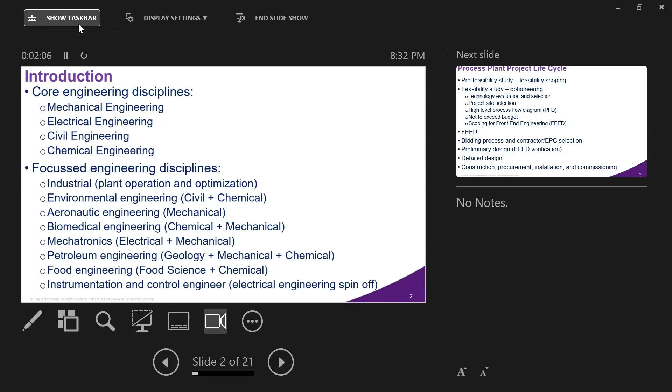So when someone wants to consider engineering as a career, they have to think about whether they want to be a general engineer, which is the four disciplines that I've just mentioned, or they want to focus on a specific engineering discipline, like aeronautic engineering, or mechatronics, or petroleum engineering. So these are the main engineering disciplines and the spin-offs.

So the next slide is the process plant project life cycle. Every process plant project starts with the pre-feasibility study, which is basically feasibility scoping. And then follows the feasibility study, which is optioneering: technology evaluation, selection, project site selection, high-level process flow diagram, not-to-exceed budget, and scoping for front-end engineering, which is called FEED.

Most of the people who are familiar with FEED are those from oil and gas. Other disciplines in the municipal world use preliminary engineering, but in oil and gas they use FEED, front-end engineering, which is basically preliminary engineering. So it starts with pre-feasibility, feasibility, FEED, and then the bid process and contract, EPC selection, and that's where the bid ends.

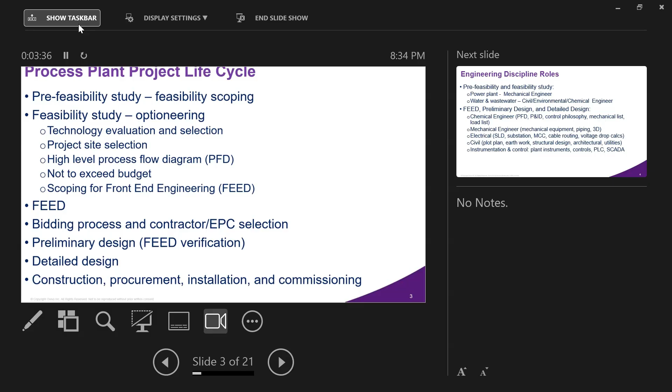And then the successful bidder starts to do preliminary design, which is basically FEED verification, detailed design, construction, procurement, installation, and commissioning. So this is the life cycle of any process plant, from the beginning to the end. And there are different disciplines that contribute to this effort.

During pre-feasibility and feasibility study, if it's a power plant, a mechanical engineer will take the lead. If it's water and wastewater, civil, environmental, or chemical will take the lead. During the FEED study, which is front-end engineering design, if it is a process plant, chemical engineers will prepare the process flow diagram, the P&ID, which is the piping and instrumentation diagram, control philosophy, mechanical list, and load list.

They will prepare that. And the mechanical engineer will prepare mechanical equipment, piping, and the 3D. The electrical engineer for the plant will prepare the single line diagram, SLDs, substation, design of transformers, motor control center, MCC, cable routing, voltage drop calculations, and all that will be done by the electrical engineer.

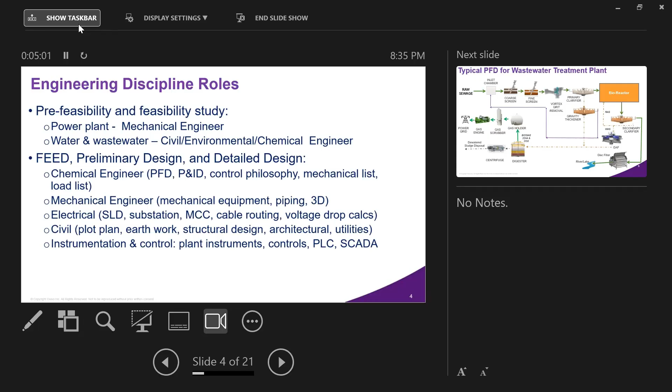The civil engineer will do the plot plan, earthworks, structural design, architectural, utilities. Architectural, even though it's a different discipline, a lot of people club it with the civil. And then the least known engineering discipline is instrumentation and control, which plays a huge role in the process plant industry. They prepare the plant instruments, controllers, PLC, SCADA system. These are mostly either electrical engineers who get trained or instrumentation control engineers.

So this is just a basic process flow diagram for a wastewater treatment plant, sewage treatment plant. You can see you have got a coarse screen, finer screen, grit removal system, primary clarifier, bioreactor, secondary clarifier. And then the sludge goes to a digester producing biogas, and the biogas is used to produce electricity using a gas engine. Then treated water goes to a disk filter and use.

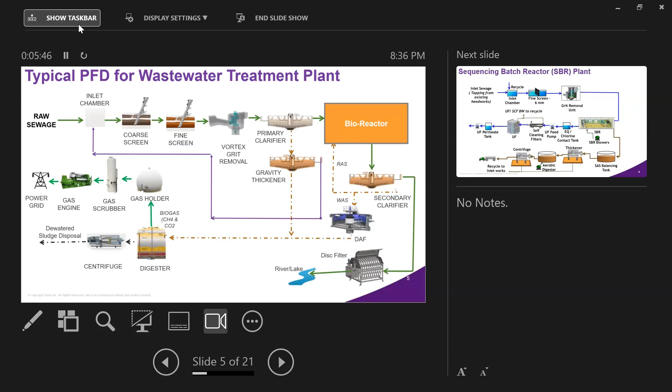This is actually a project that I worked on in the past, and this project is in the Middle East, and one of them is also in India. So basically, this is just a general process flow diagram. This is also another one, which is a sequencing batch reactor, which also uses ultrafiltration as a tertiary treatment, and thickening and dewatering. So this is basically what I said, process flow diagram. This is what I actually mean.

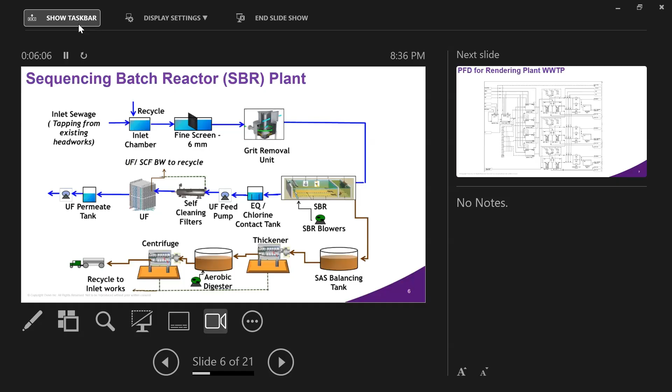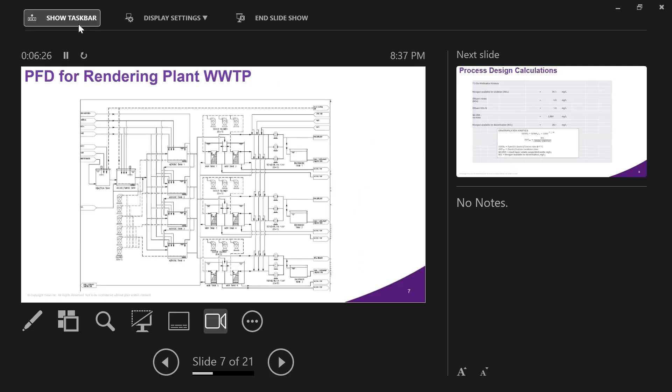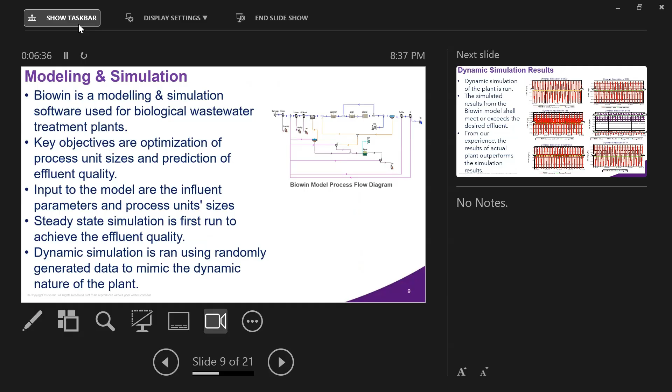Now, this is an actual process flow diagram that's part of the deliverables for the process chemical engineering discipline. I'm not going to spend a lot of time explaining what it is. I just want to give you a high-level understanding of how the different engineers work together in a project. Process engineers will prepare the design calculations. They will prepare the modeling and simulation for the plant. Before you build the plant, you have to make sure that it's going to work, and that's where the simulation and modeling comes into the picture.

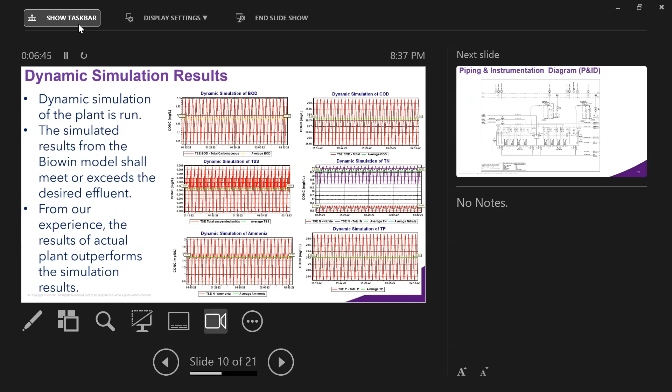And then prepare the piping and instrumentation diagram. The piping and instrumentation diagram is basically the blueprint of the plant, and this is what chemical engineers will prepare. It will show the pipe size, all the instruments required for the plant, where we need to have MCC control, where we need to have PLC control. It will show all the instruments, all the valves, all the details of the instrument, whether it's a flow meter, a level transmitter, a pressure sensor, temperature sensor. All those need to be shown here, and this is what everybody else is going to use downstream.

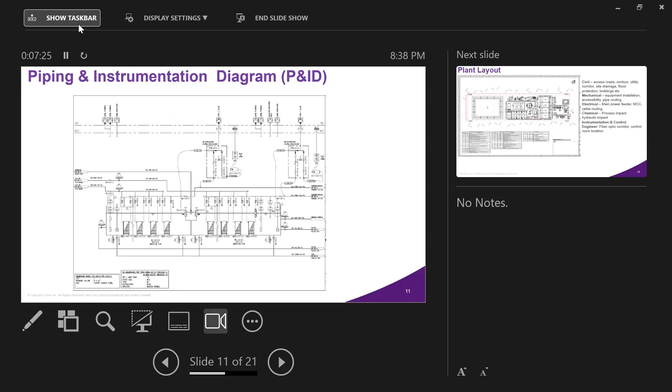This is a wastewater treatment plant plot plan. And you can see different contributions from different engineering disciplines. The civil engineer will take the lead in access roads, contours, utility when preparing the plot plan, because the plot plan has to have access roads, and you can see there are roads all over the place. The mechanical engineer will look into equipment installation, accessibility, piping, all of those things when preparing the plot plan of a plant.

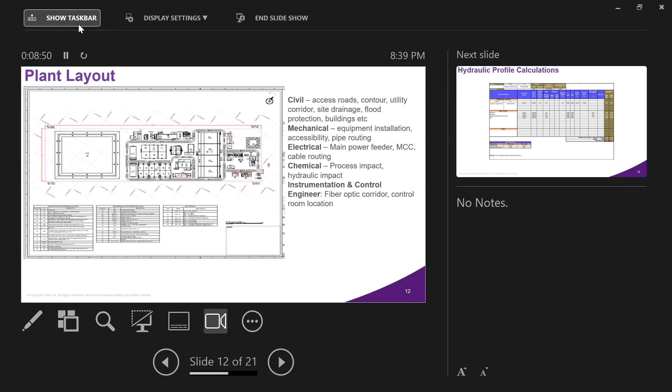It's not only one discipline that will get involved. It will be multidiscipline: civil, mechanical, electrical, chemical, instrumentation control. All of them have to contribute. The electrical engineer will check the main feeder, the MCC, the cable routing. The chemical engineer will check if any of those changes will have any impact on the process or hydraulics. The instrumentation control engineer will check for corridors for the fiber optics, control room locations, and all that. Normally it takes quite a bit of time to come up with a semi-perfect plot plan, because all those disciplines have to contribute and make sure the corridors for utility, power, accessibility, all those things are taken into account.

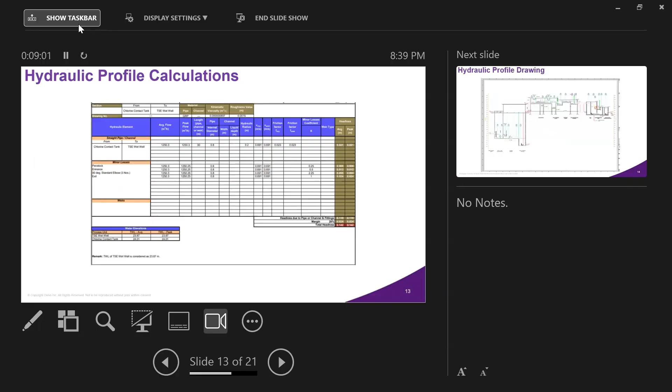This is just a hydraulic calculation spreadsheet that people would normally use to calculate the hydraulic profile of the plant, calculating the head losses for the gravity flow and also the head losses for the pump flows.

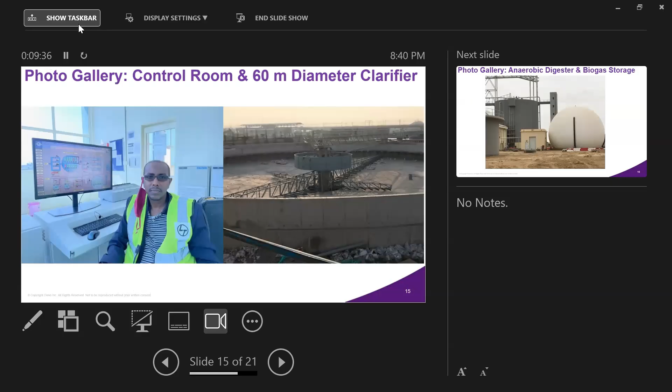This is a plant in Dubai. You can see this is a digester, and we had a biogas production, and the biogas goes to this balloon, and from there it will go to, in this case, they are using it to dry the sludge and produce a fertilizer. In other places, people will use this biogas to generate electricity and send it to the grid.

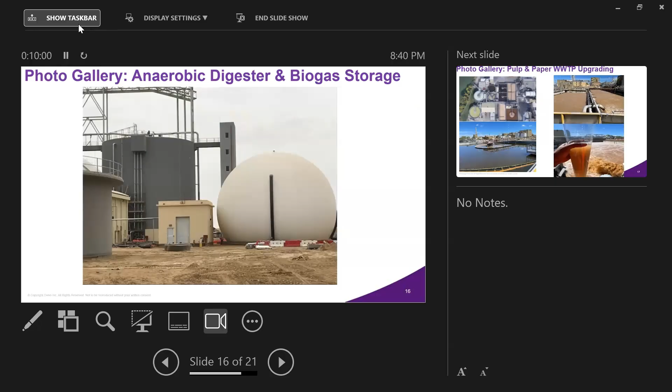This is in the US, a pulp and paper industry. Industrial wastewater is very important for the pulp and paper industry, because the pulp and paper industry uses a huge amount of water, and if the pulp and paper industry does not recycle their water, it will be very expensive to produce papers, because papers consume a huge amount of water. So what we normally do is we take the wastewater, we treat it, and then use it again multiple times, so they don't have to draw water from the lakes and the groundwater. So this is very critical for the pulp and paper industry.

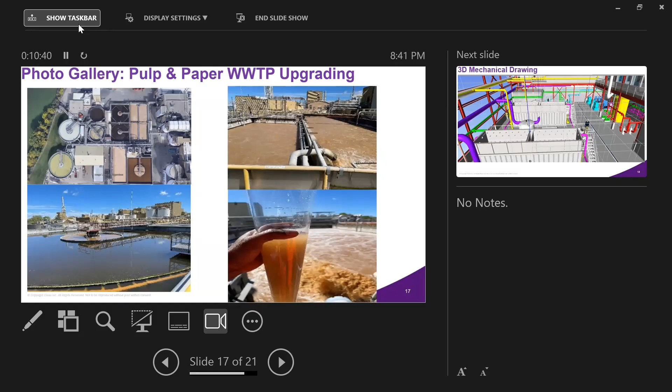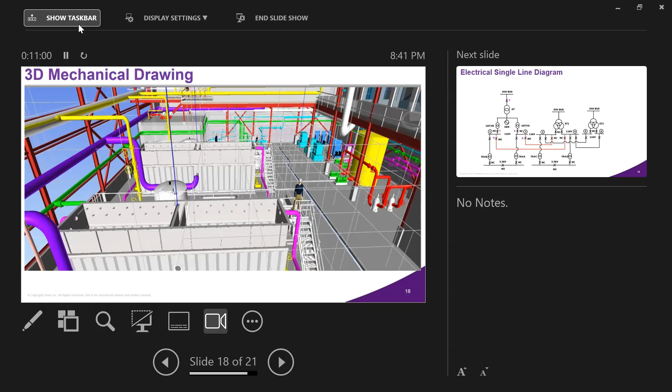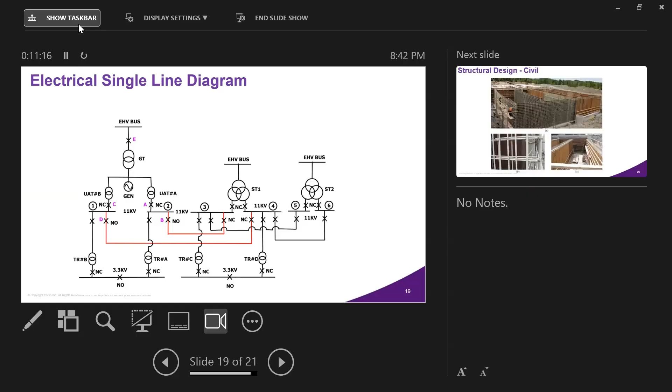This is what the mechanical engineer will do: 3D drawing, showing all the pipes or showing all the units, and it's critical nowadays to see all the clashes between different disciplines when you have a 3D drawing. This is a typical single line diagram for electrical engineers that they prepare for the project. And the single line diagram will give you an overview of where the power is coming from, where you have transformers, and where all the distribution systems are.

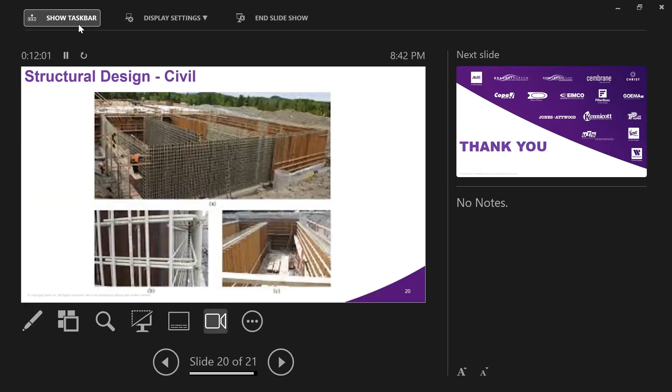You can see this is civil engineering structural for the concrete. So the civil engineer will design the structures, put together the structural analysis and produce the structural drawings that can be used for the construction of the plant. So the objective of this presentation is to show you a process plant, how many disciplines contribute to it, what their backgrounds are, and just to give you a general flavor of the area that I'm actually specialized in, which is water and wastewater treatment systems. So that's my presentation in general.

Just like Guled, I've been in the industry over 30 years. I worked in many different places. Currently I'm working in Salt Lake City. Before that, I worked for Larsen & Toubro, and I've traveled extensively all over the world, building plants and training engineers. So that's the conclusion of my presentation.

I just want to give a little bit of advice for the engineers sitting here tonight. First thing I would like to advise them is that your career is everything. You have to put your heart into it and be the best in the industry. That's number one. The second thing is you need to help your peers. When I started practicing engineering in Canada back in the early to mid 90s, it was very difficult to find any Somali that you could ask any question. We didn't have anyone to mentor us. We were just on our own. We just had to figure out things on our own. But now you have so many Somali engineers who can really help you in every discipline.

So those who have got jobs, I would advise that they really have to seriously help others to get into the industry, get a good job, and also encourage those who are going to universities to really focus more on engineering, because as you all know, engineering is only 4 years. It's not too long. Second thing is it's easy to find a job compared to other disciplines. And being a minority, I think it's always helpful to have a skill under your belt. So that's basically my advice with respect to the career.